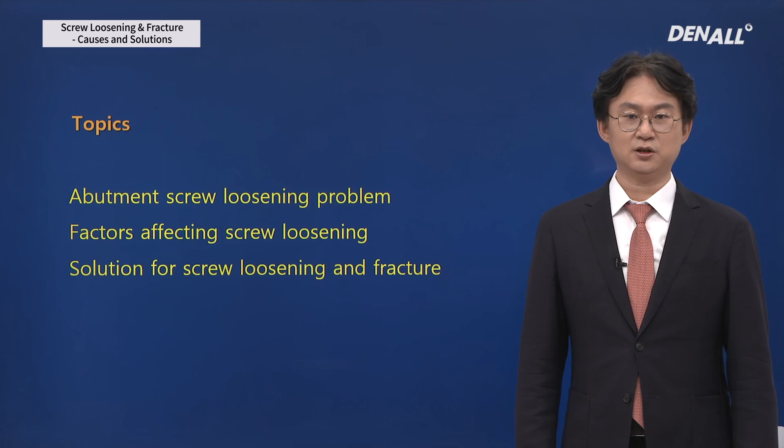Hello, I'm No Gwante from the Prosthodontics Department of Kyunghee University. Today, we are going to look at screw loosening and fracture causes and solutions. These are the topics I'm going to cover today. I'm going to talk about problems related to screw loosening, what are the reasons for screw loosening, and how we can resolve screw loosening and fracture.

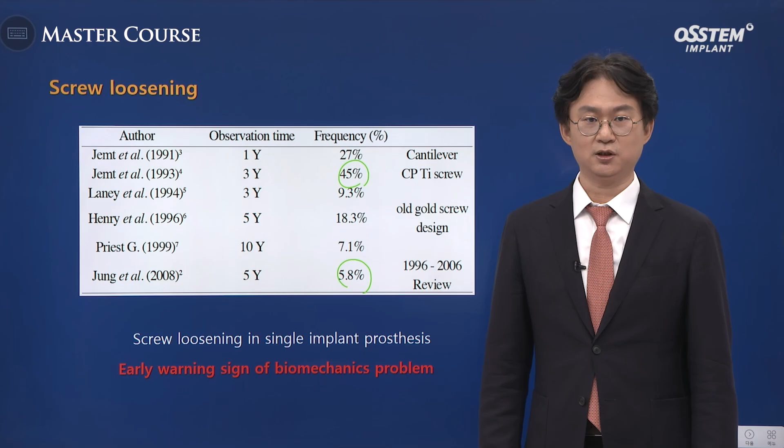Screw loosening, rather than being just a loosening issue, additionally results in biomechanical problems that lead to implant failure, and that is why it is important. Various studies say screw loosening and implant fractures are related, so screw loosening could ultimately result in implant failure.

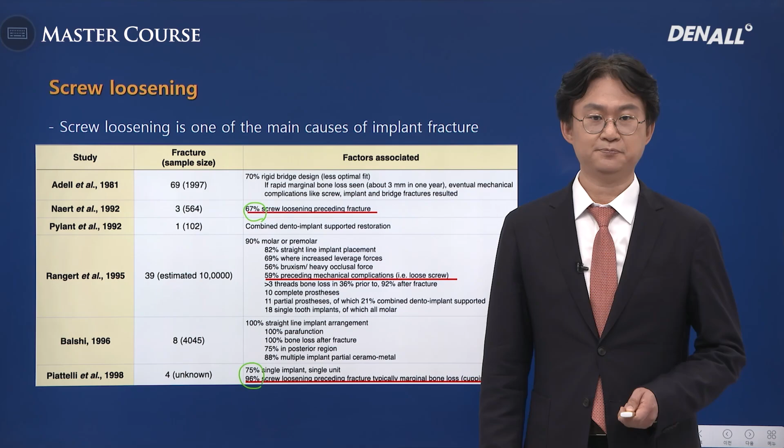So to prevent screw loosening, you have to know what to do. In many literature, it says 67% as much as 96% of cases show screw loosening is related to implant fracture.

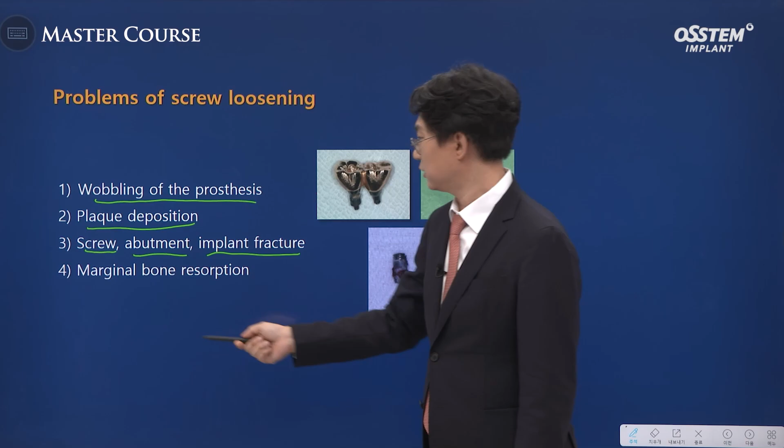Screw loosening does cause additional problems. As I said before, it wobbles the prosthesis, and as a result, plaque can deposit around the implant. Also, the screw, abutment, and implant could fracture, and as a result, marginal bone resorption could happen.

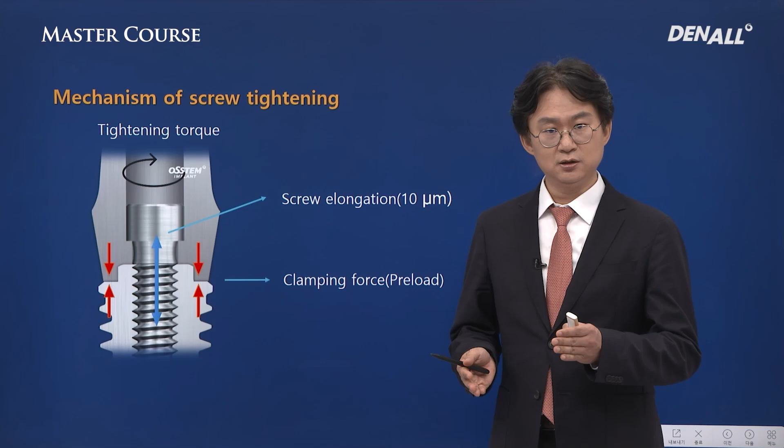To identify this issue, you have to understand the mechanism of the screw. Screw tightening means that with screw friction force, abutment and implant connection is maintained. When you tighten the screw, usually in the clockwise direction, the screw is metal but it elongates. That elongated force, in reaction, brings the abutment and implant together. We call the reaction to that elongated force the preload.

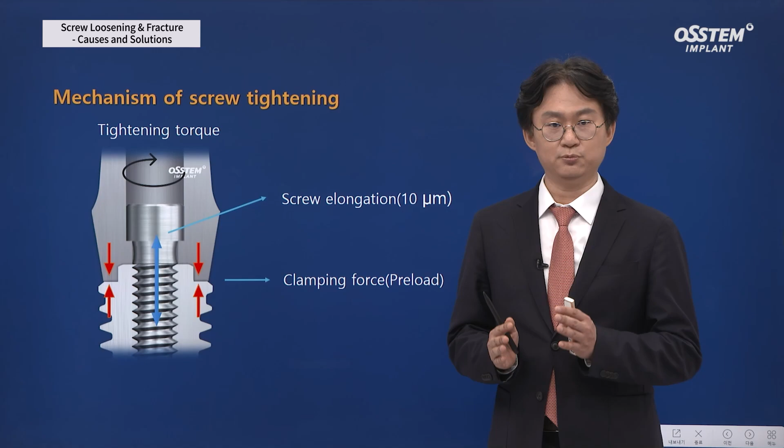Preload is about 400 newtons. Preload compared to occlusal force, if it becomes bigger, the screw stays in place without becoming loose. Typically for a screw, about 10 microns is the elongation length.

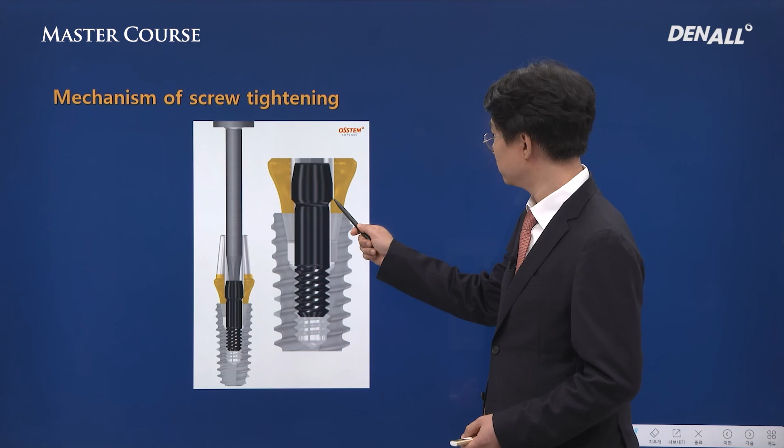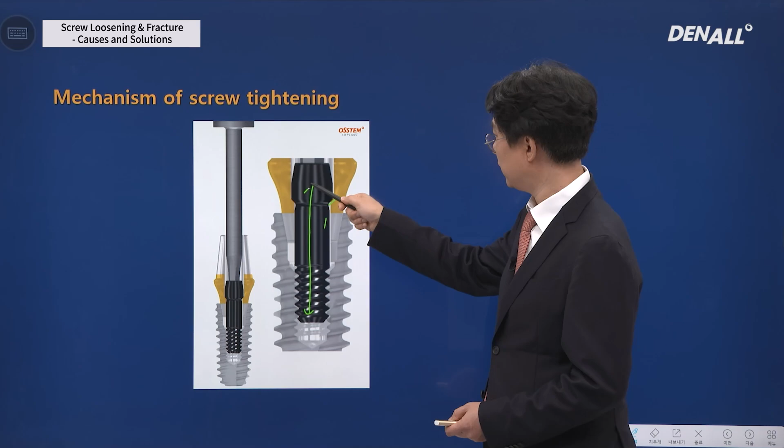So this is how the screw is tightened. You have the implant and abutment, and with the torque wrench, you tighten the screw in the clockwise direction. As a result, you have contact, and depending on the torque, the screw elongates in this direction by about 10 microns. As a reaction to that, the abutment and implant come together and are connected.

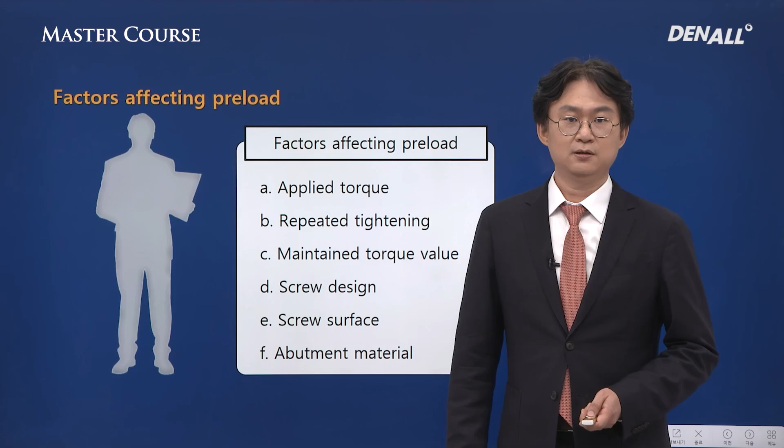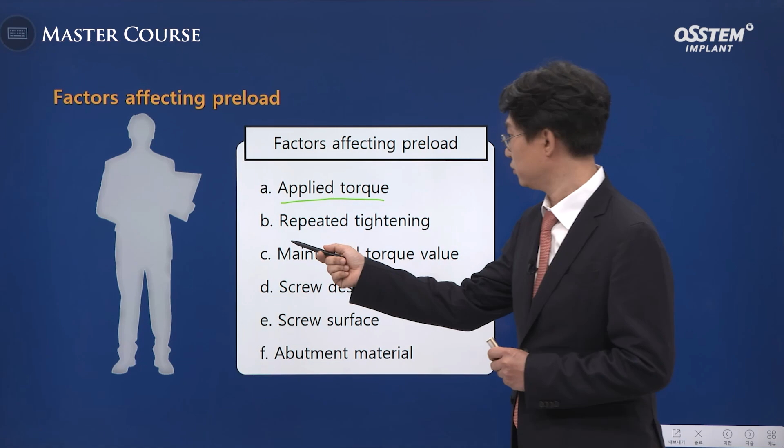Preload has different factors that affect it. Typically, torque plays a role, and repeated tightening is also needed. You have to comply with the protocol to prevent the screw from coming loose later. Just tightening with your hand once, or giving only one torque application, makes it very likely the screw will become loose. So you have to abide by the protocol.

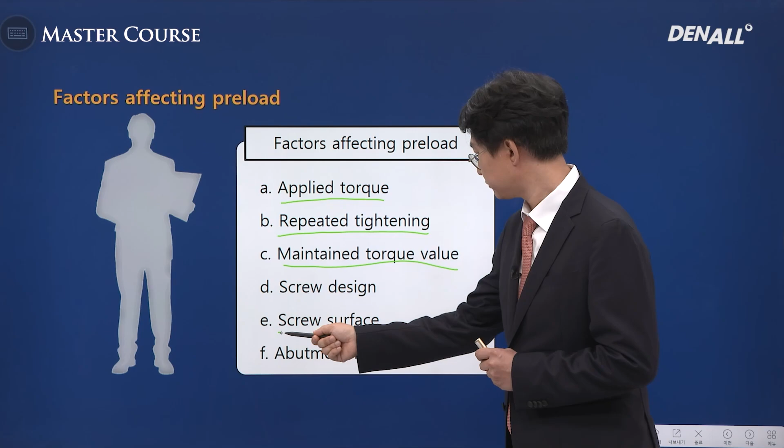Another important thing is that the torque value needs to be maintained, and I'm going to tell you how. Screw surface is also important, so I'm going to talk about these topics today.

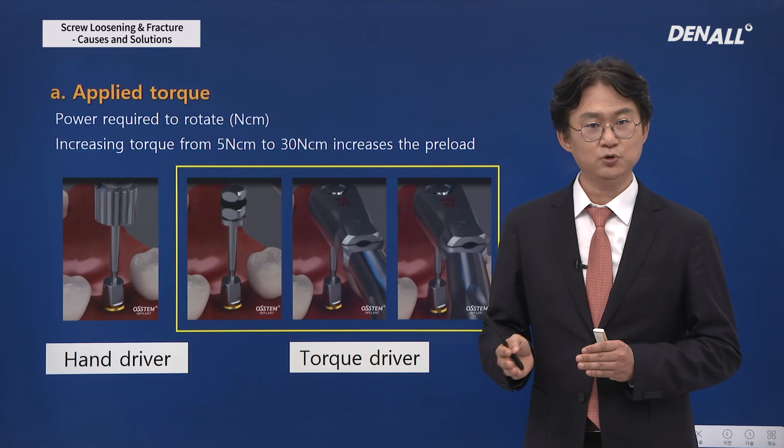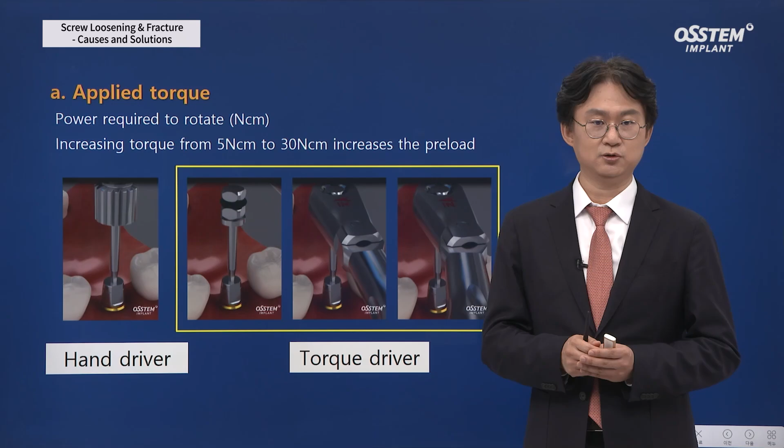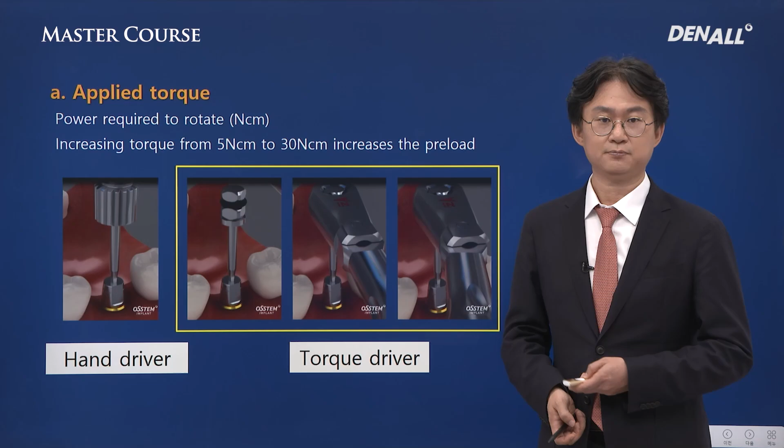But to maintain preload, you should not only do it by hand, but use a torque wrench or torque driver, either a ratchet type or spring type. So 30 to 35 newtons of connection force needs to be applied using such a driver.

But the connection force will be different by screw. By implant, the screw diameter is different. That is why you have mini implants and regular implants, and mini implants have thinner screws. A thinner screw means, compared to a regular screw, you cannot give the same force. Maintaining preload means the screw needs to be elongated, and in reaction to that, you maintain clamping force.

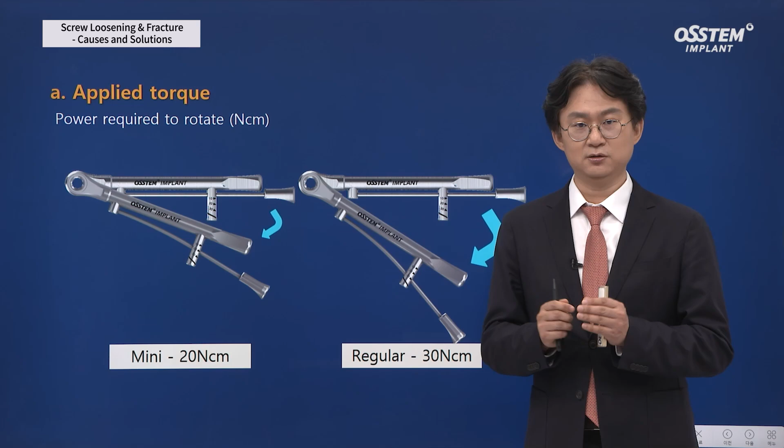Just giving force does not mean that it will become less loose. Think of metal as a spring - if you elongate it too much, it deforms. Same with metal: if you give too much force in clamping, the metal elongates and deforms. Typically, 70 to 80% of tightening compared to the stress level is given, because too much force could cause deformation. In mini implants, if you give regular torque, the screw can be deformed because the screw is thin, and the prosthetic screw is also thin. So 20 Newton is the load you give. You have to know how much torque to put.

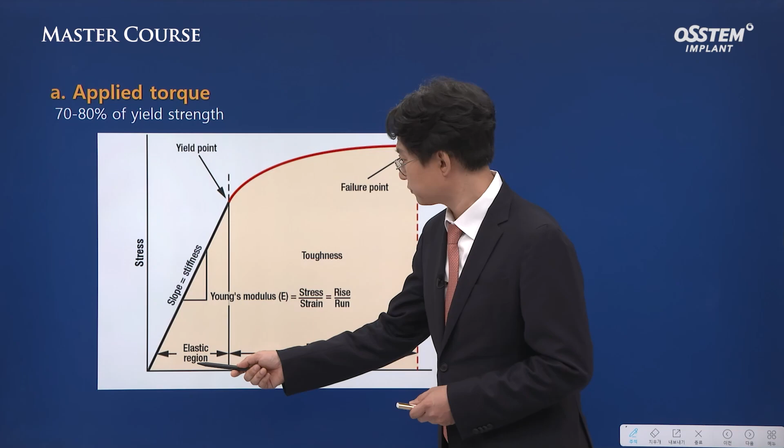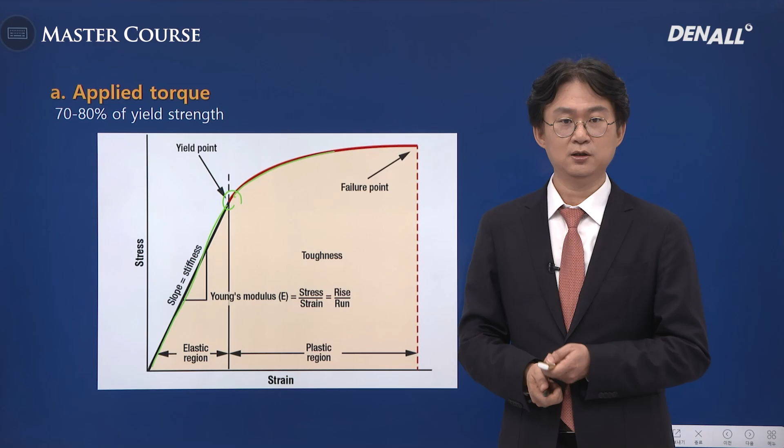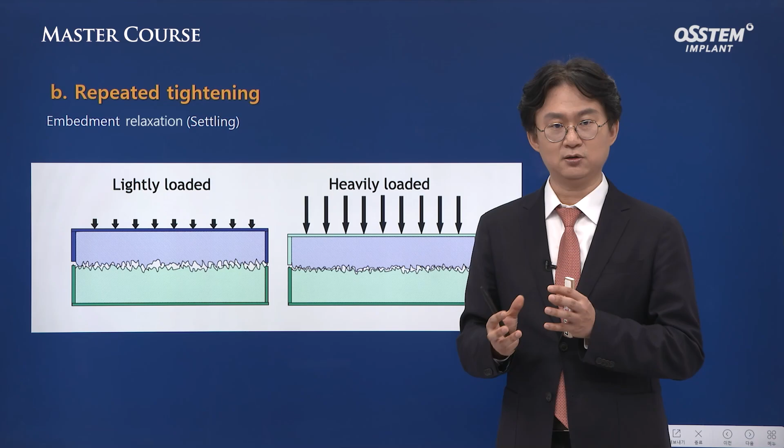When you tighten a screw, if it ends with just one tightening, it will be good. But the screw, abutment, and implant, if you look with a microscope, have a very delicate, minute roughness. If you tighten the screw, the roughness becomes dull and the surface becomes smooth, and it becomes a bit loose. So when you tighten the screw and metal, as a result it becomes a bit loose - this phenomenon is called embedment relaxation, or also settling.

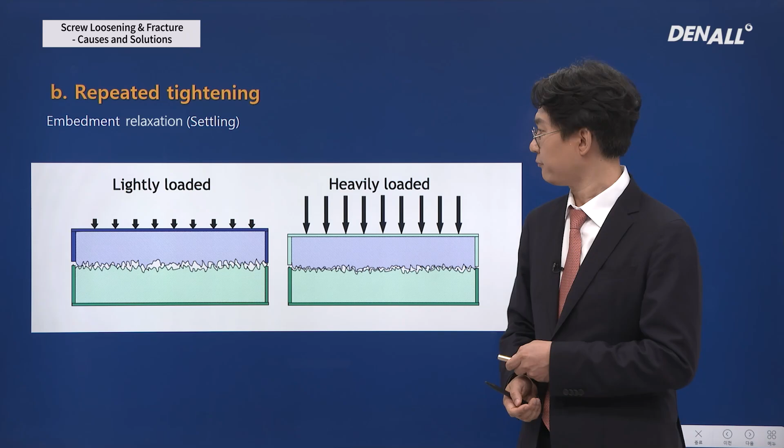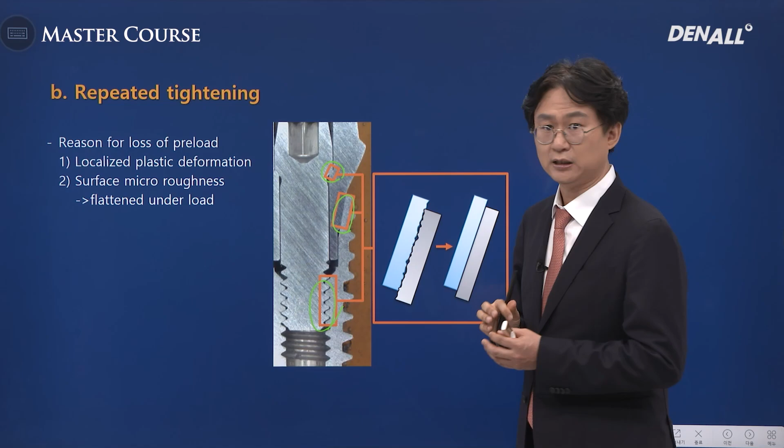Because of settling, all surfaces of the implant and screw that come into contact experience this effect. When the implant touches the abutment, or the implant connects to the screw, and where the abutment and implant come into contact, if the position changes, then the elongation of the screw - that length - would be different, hence changing the preload.

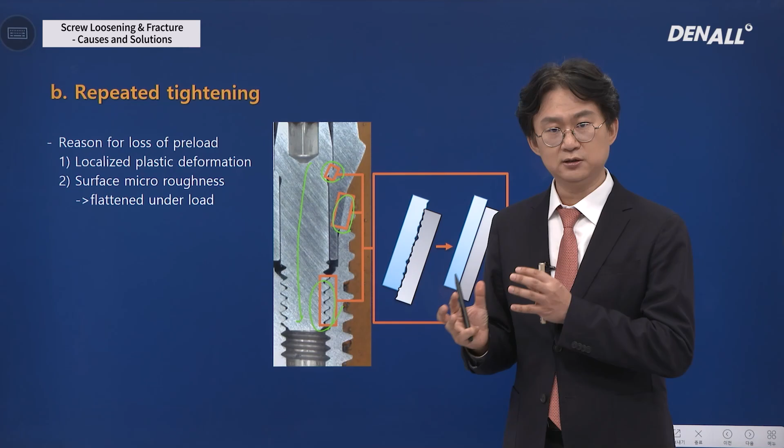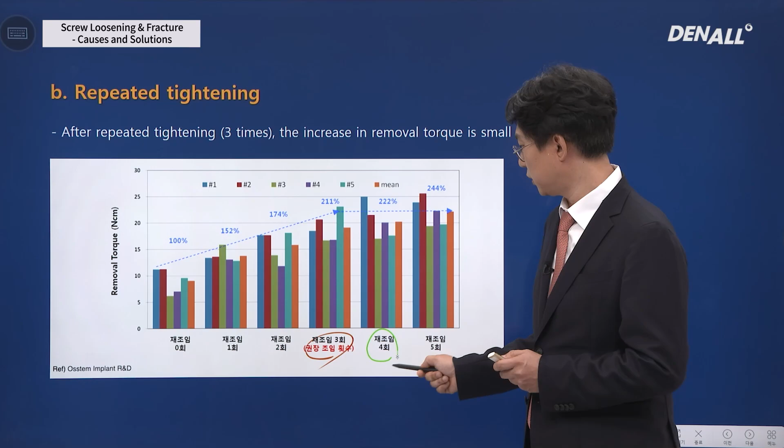To prevent the screw from loosening in the beginning, you have to do retightening. Everybody agrees on retightening, but the time interval for retightening has different opinions. They all agree that at least 2 times, or maximum 3 times, of retightening in the beginning is important in preventing screw loosening. Different literature shows that more than 3 times doesn't change much, but a minimum up to 3 times of retightening is good - that's how it's reported.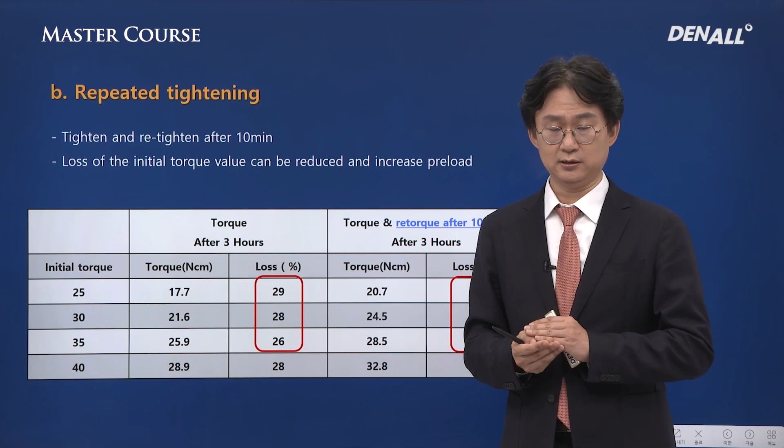After a tightening time interval is given, they say to retighten. This is because of the settling effect in the beginning, and also when you retighten an internal conical implant, there's a bit of change in the abutment, so retightening is necessary.

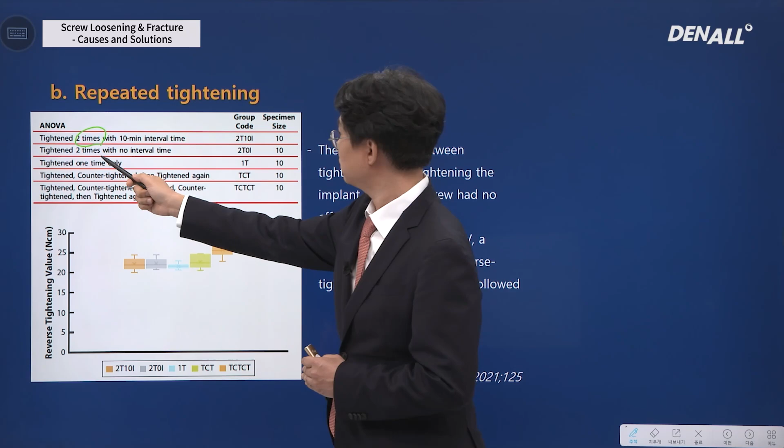When comparing retightening versus no retightening at 30 Ncm, after 3 hours, the torque loss rate becomes different. This literature was published in JPD 2 years ago. With a time interval and tightening 2 times being the conventional method, this study compared 10 minutes of time interval versus no time interval, and also tightening just once, versus tightening, counter-tightening, then tightening again, repeating that twice.

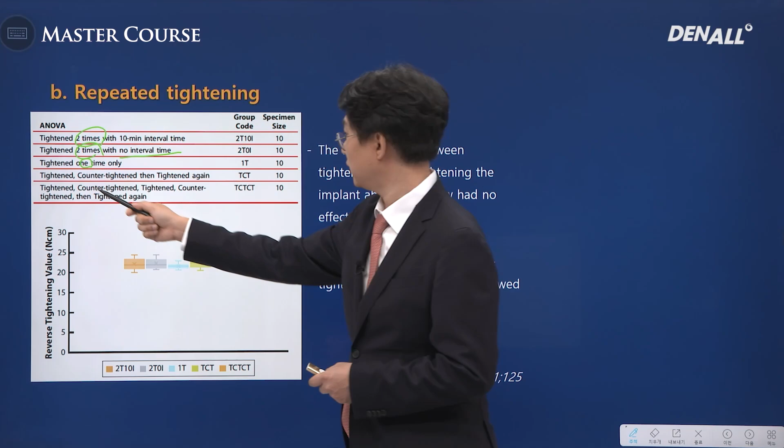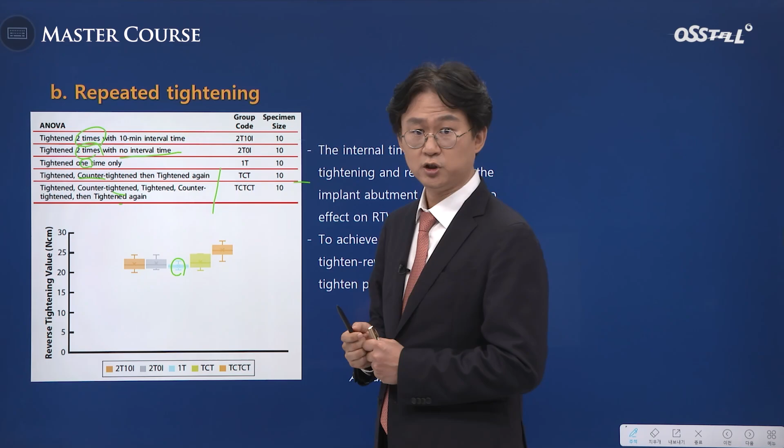Sample size was 10 for all groups. In the experiment, compared to tightening once, others have higher values, but the highest removal torque value came from the 5th approach: tightening, retightening, tightening, retightening, and then tightening again - that is, tightening, counter-tightening, tightening, counter-tightening, and tightening again. What's interesting is that the 10-minute time interval versus no time interval showed not much difference.

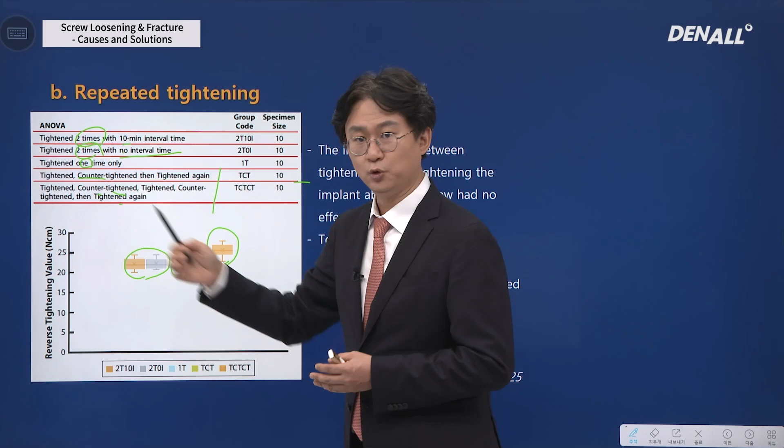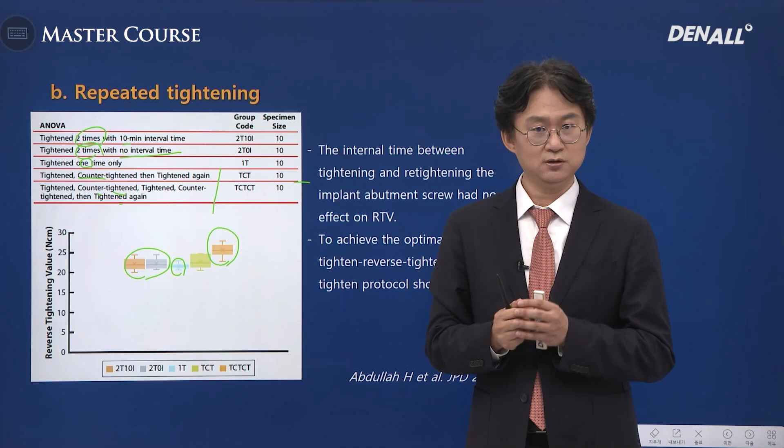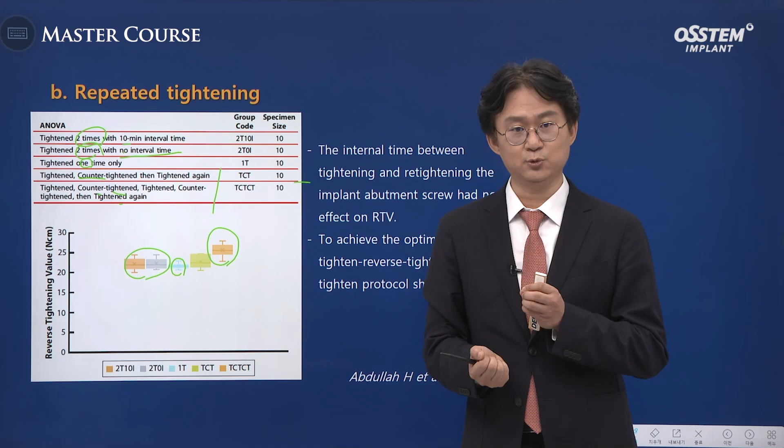This is a bit different than other studies, but here a gold-coated screw was used, so additional experiments might be necessary. What's interesting again is that tightening, loosening, tightening, loosening and tightening again had the highest torque level. I think this means the settling effect comes after a certain time, and these steps accelerate the settling effect, reducing friction between metal surfaces. Reduced friction means the tightening torque is fully given to the screw, elongating it. So wear happens in the beginning, making the surface smoother. Of course, further additional studies would be necessary to be sure.

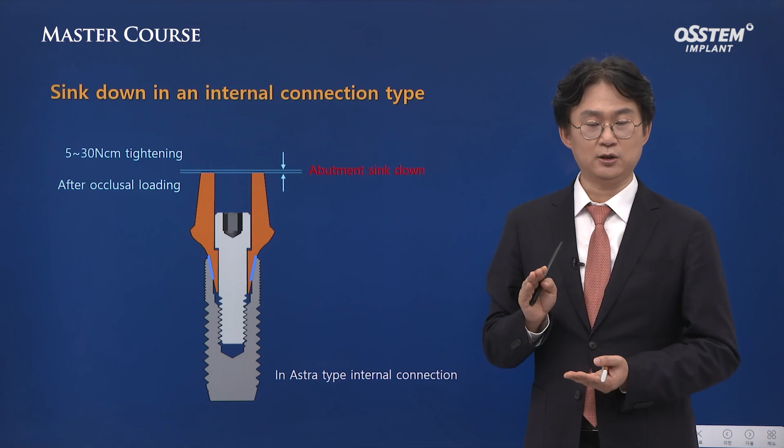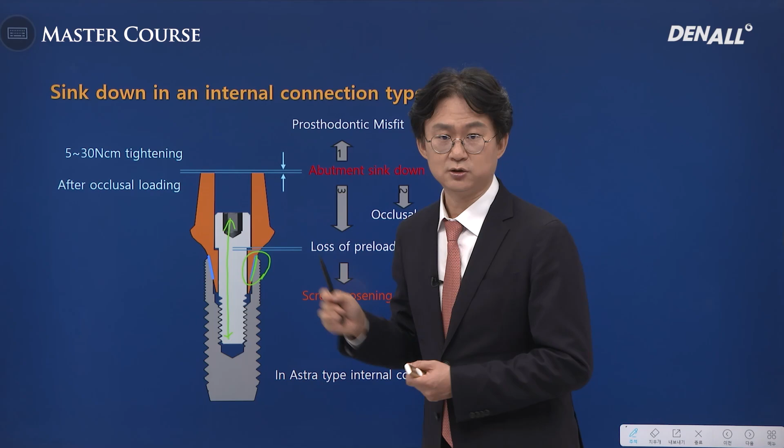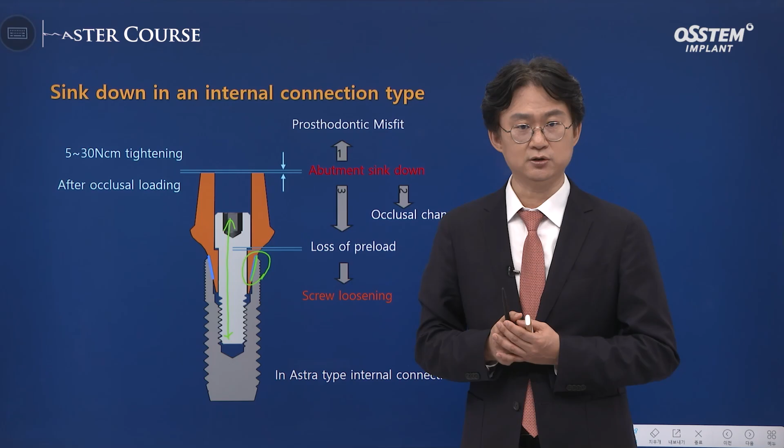When you tighten the screw, you have to do it at least 2 times. This is for internal conical connection - settling effect happens between abutment and implant. With the settling effect, the abutment comes down about 4 to 5 microns. So abutment sinking down means the elongated screw becomes shorter.

So if you have a screw type of prosthesis, once you tighten - for example 10 microns - and you finish occlusion and tighten with the ratchet, the level would actually go down. With retightening, the abutment comes down again. So at least 2 retightening steps would be very much necessary.

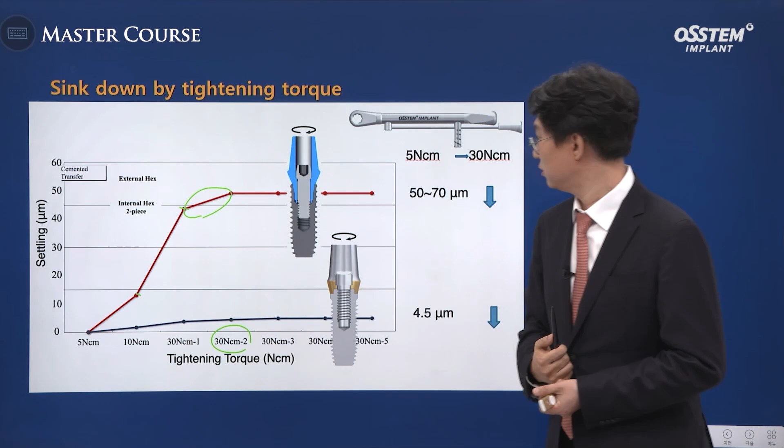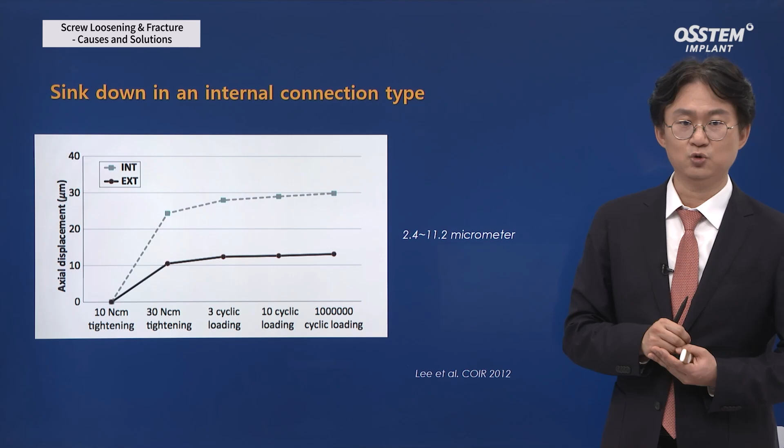In using implants, in the axial direction, there could also be sink down. That amount is different by study or literature, but here it's from Dr. Lee - it says this much in micrometers has been reported in this study, and in usage the abutment sink down happens a lot within the first month. So if you even consider that, retightening after 1 month could also be helpful.

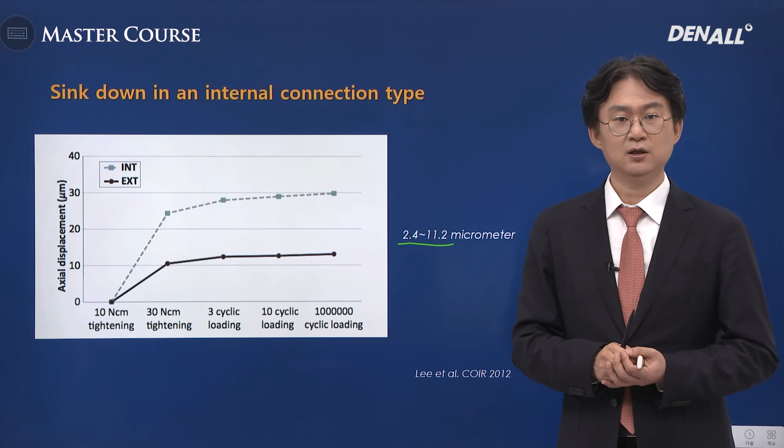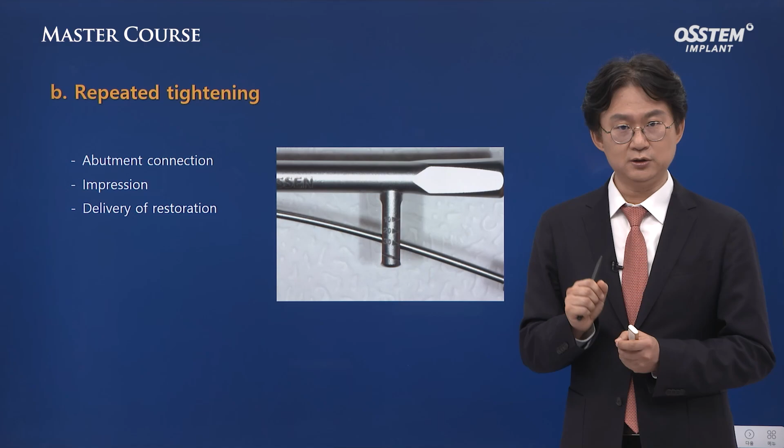Repeated tightening is very important. If you are using a temporary, then when you connect the abutment, in using it, and also taking impression and delivery of restoration, tightening in different steps will be necessary. If you do same day delivery and also retighten again, and you put load on the abutment of the prosthesis beforehand, then tightening again might be also necessary.

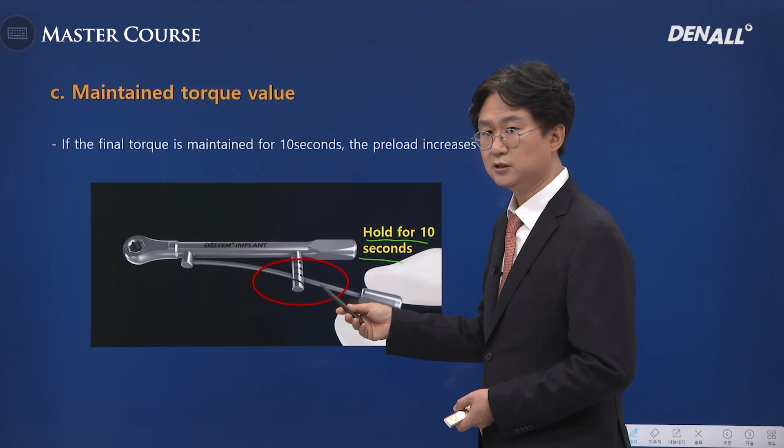To give tightening torque, as I said before, you need to use a torque wrench, and this spring type torque wrench can be used for tightening. You hold for 10 seconds - that's the recommendation. Spring type torque wrench, after time, torque becomes, they say, reported to become weaker. So every 1 or 2 years you have to check whether torque has not been reduced - you have to do calibration.

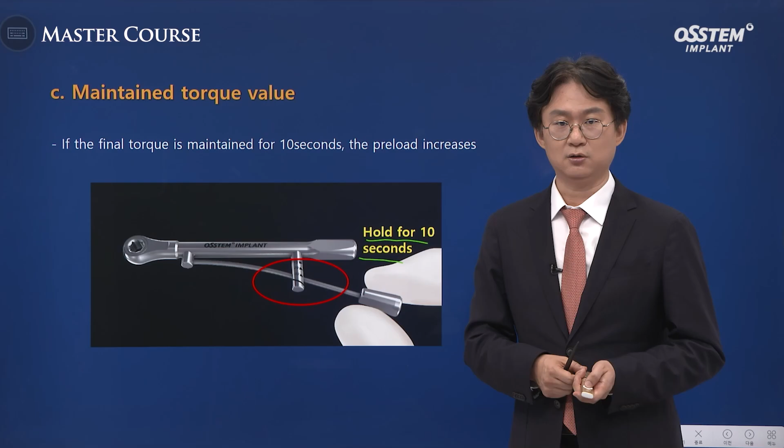With the torque limiting device, you could also use it, but the spring elongates, and when you clean it, it could also reduce torque. So you have to calibrate regularly and do regular maintenance and checkup.

Now, screw surface impacts the preload. Of course, the torque that you put on needs to have less friction.

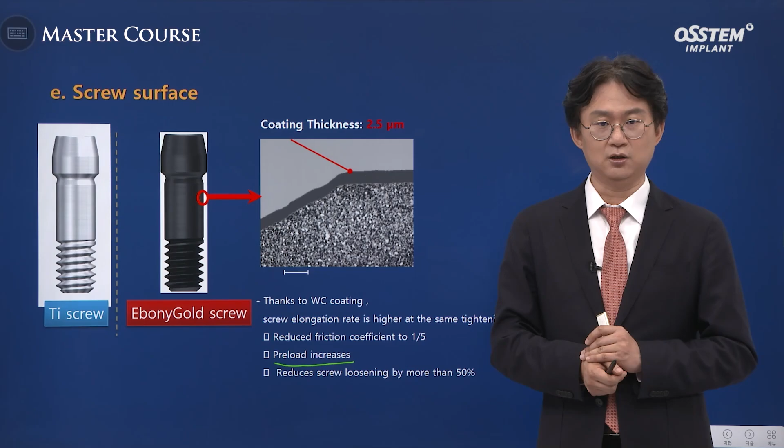For external implants, the screw played a more important role, and to reduce friction of the screw, Teflon coating and gold coating was done, and now Osstem EbonyGold screws are also coated. This coated screw is very thin, and the torque that we load extends or elongates the screw, creating better preload or increasing preload. So if you have more preload, it's reported in various researches, but whether it has a meaningful difference in screw loosening seems to be a different debate, which means additional clinical study in this area would be necessary.

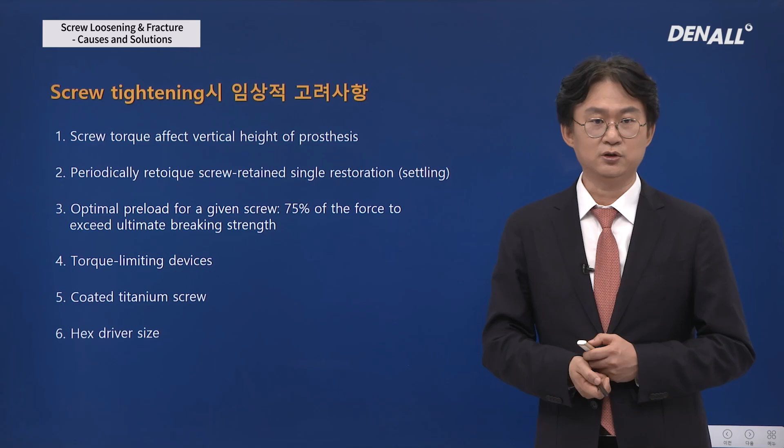So again, in screw tightening, what are the clinical considerations we need to be mindful of? Screw torque for the internal conical implant affects vertical height. With the settling effect, the abutment sinks down in the beginning, and depending on the torque, the abutment sinks down to different levels. So you have to consider that and do the retightening.

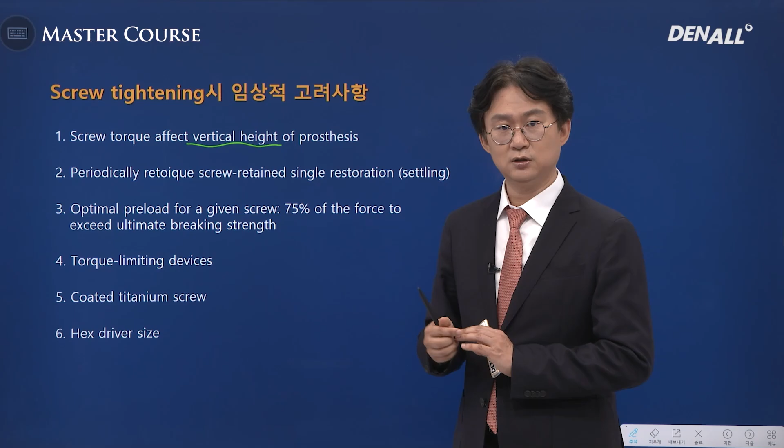And with time, settling happens - the abutment going down by 2 to 10 microns could occur. So periodically, torque needs to be put on. So that type of protocol needs to be used.

And stronger does not mean better. So 75% of the force - you only do as much as the level recommended by the manufacturer. If you go too high, it doesn't really help in terms of screw loosening or other areas.

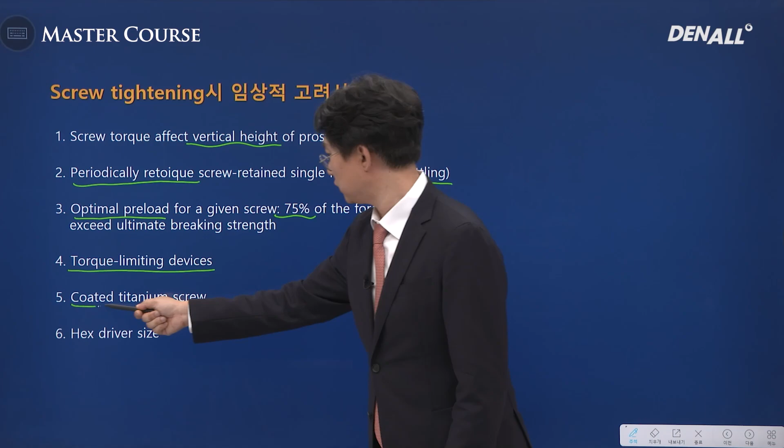You also have to regularly check the torque limiting devices and do calibrations of those devices. Coated titanium screws improve the preload in the beginning.

And hex driver sizes - hex size is different by implant, so you have to be aware of that. And the screw sometimes becomes dull with time, so you have to check that.

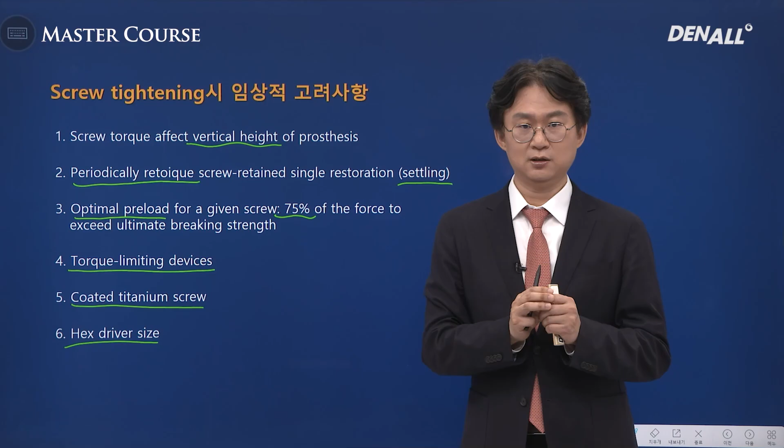The hex driver - if it becomes dull, you have to change to a new product. If you use it for tightening even after becoming dull, the screw head could wear down. It tightens, but you cannot counter-tighten or loosen it again. So you have to check how much wear happened on a regular basis.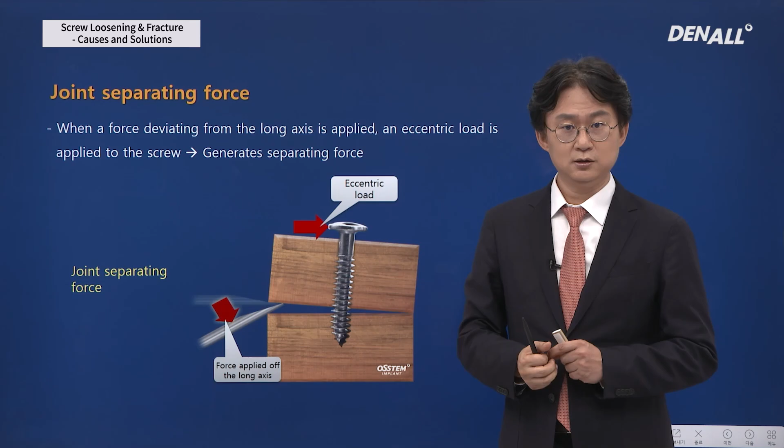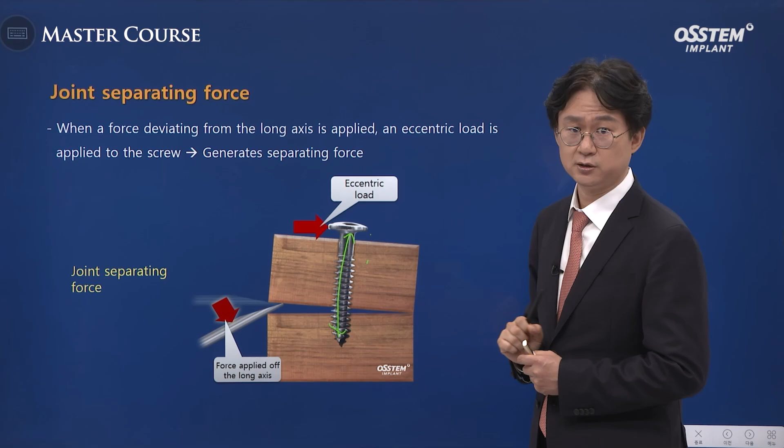Now, screw loosening - there are different factors that come into play, basically the screw maintaining preload and putting the clamping force. These two are connected, but if the occlusal force or other forces is stronger compared to the connecting force, then the screw would be impacted and become loose as a result. So for screw loosening and fractures, there are different risk factors.

There are implant-related factors like angle and position. If you have a small diameter implant, the external wall thickness could also play a role in loosening. And if the abutment is not correct, it could also become loose. If you don't abide by the right protocol, there could also be loosening.

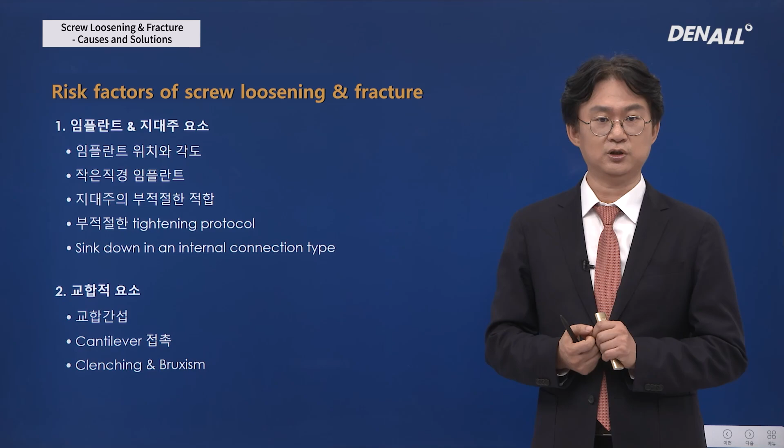And for the internal connection type, the sink down is also something you need to consider. As for occlusion factors, occlusal interference, cantilever contact, and patient habits like bruxism and clenching could also result in loosening and fracture. So let's look at some of them.

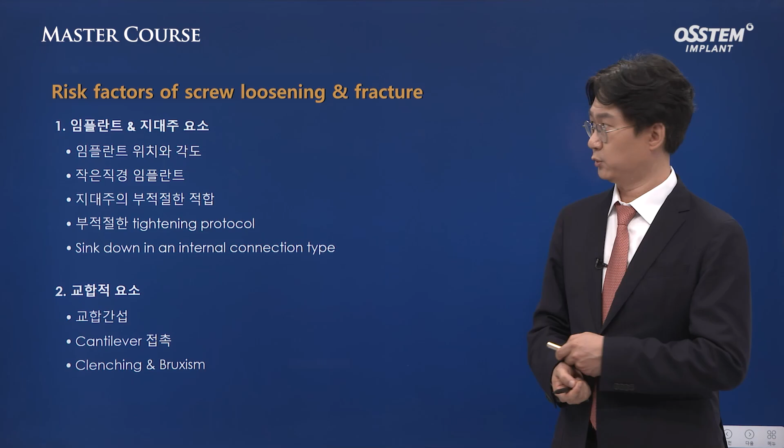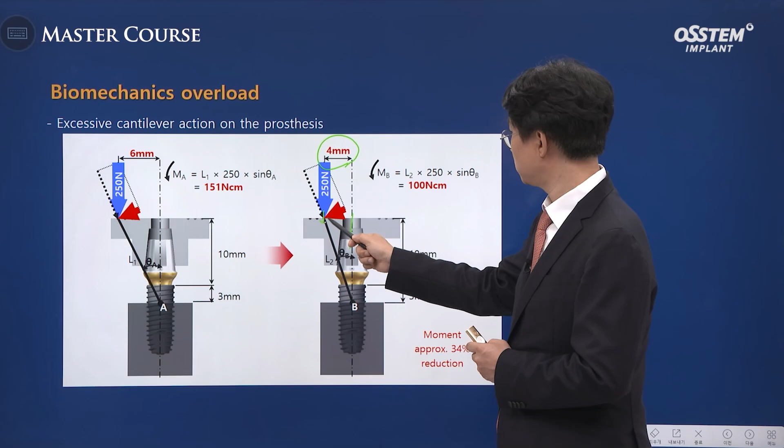Now, cantilever - if you load that 4 millimeter implant in the center, the contact that is beyond 4 millimeters, the resistance becomes weaker and it's not really good. Compared to the contact here, if there is a contact point for 6 millimeters, then 34% reduction would be the result.

So for the implant itself, becoming a force for cantilever - if it's beyond 4 millimeters as a contact point, then mostly it's molars. For premolars it's not so. If the implant is in the center, it doesn't work as a cantilever on the premolar side, but on the molar side you can actually put cantilever force.

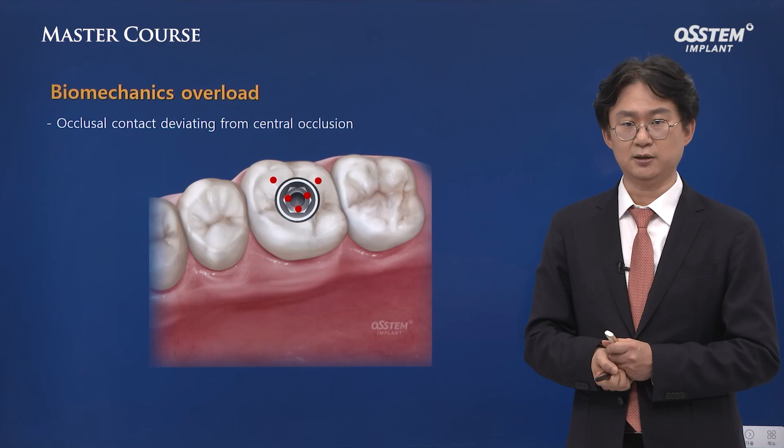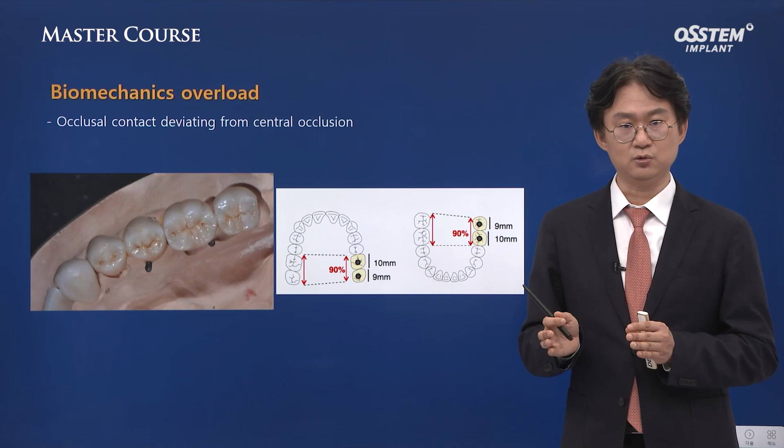For natural teeth, for molars at 10 to 9, but for the mesial and distal, if you have distal and more than 2 implants together, you have to reduce the distance, and the embrasure space can be reduced to also reduce food retention. Because of that, 6 and 7 is the implant crown I did - this size compared to natural teeth, if it's side by implant, the side needs to be smaller.

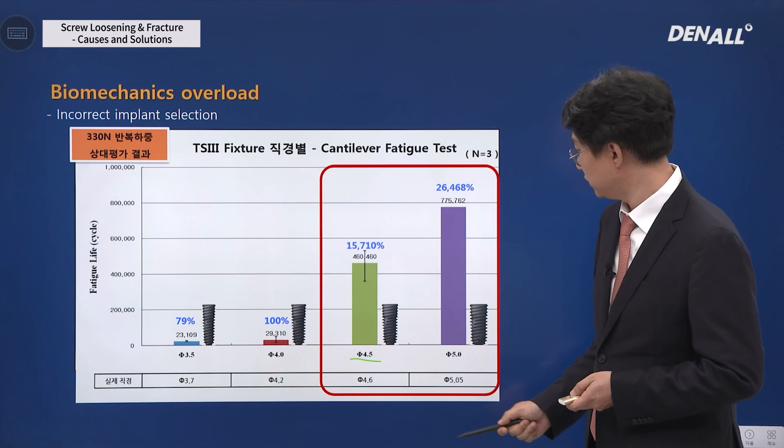Now, choosing implant diameter also plays a role in the loosening of the screw. Different external designs are reported in fatigue tests. It says that stronger implants compared to 4.0 - 4.5 and 5.0 in the fatigue test have better results.

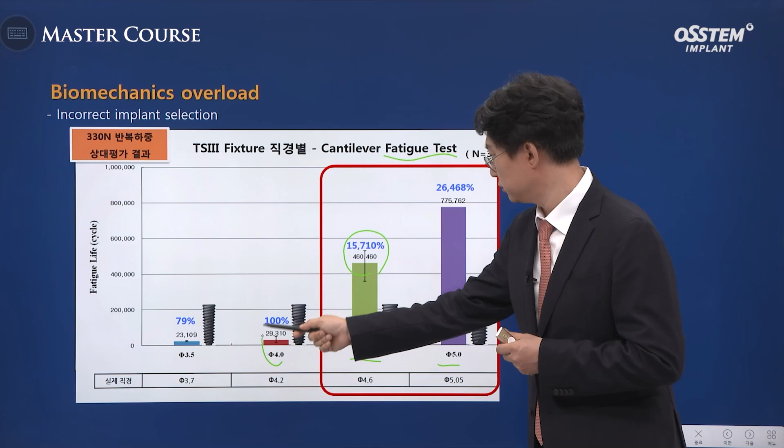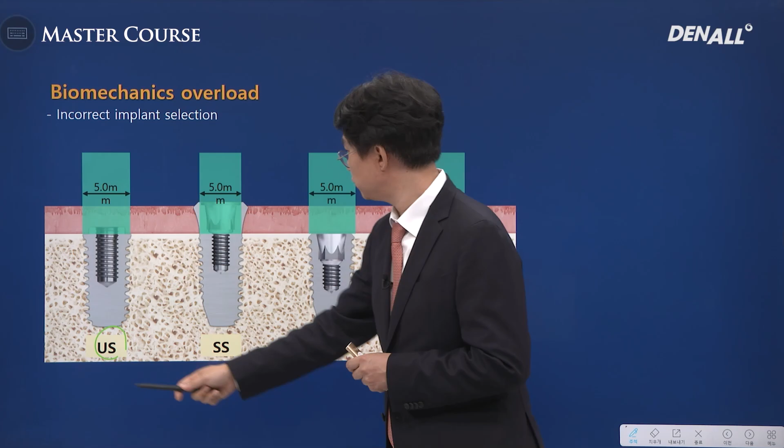Hence, in implants when connecting to an abutment, there's external implant and tissue level implant SS, and also internal connection type TS. Here, this part about 3.2, 3.5 is the connection area and abutment, platform switched, and external and tissue levels.

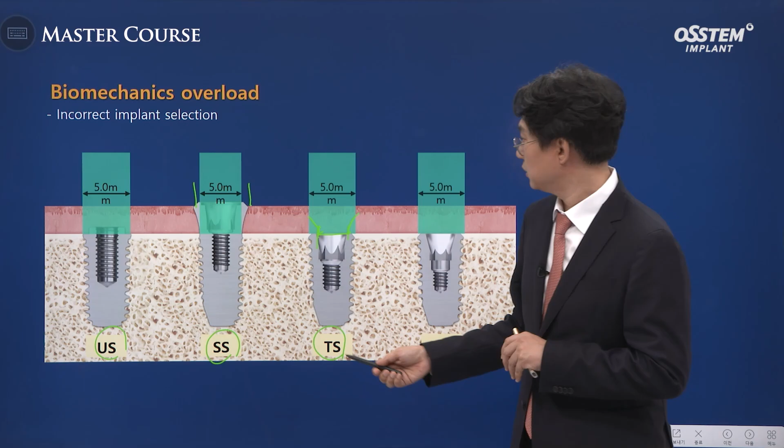A strong area becomes the abutment area, and there is more connection so it can be more resistant to cantilever. In the finite element analysis, it shows the same result. If the occlusal force is strong, then with a single implant, rather than internal connection type, the tissue level implant would deliver a more favorable prognosis in terms of screw loosening. So again, depending on your clinical situation, you just choose the best implant for that.

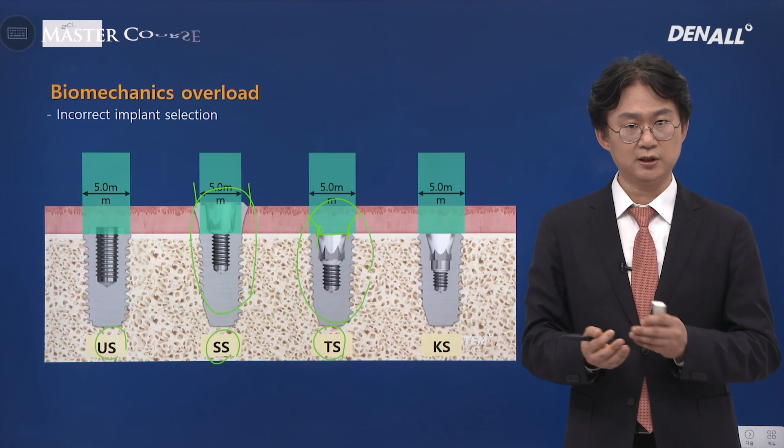Now, implant and screw loosening and fractures - again, different factors come into play, and you also need to understand the mechanics of the screw. So we looked at some areas, and additionally, if the screw becomes loose, using an SR kit and other resolutions that you could apply, through offline practice hands-on, I think we can learn more.